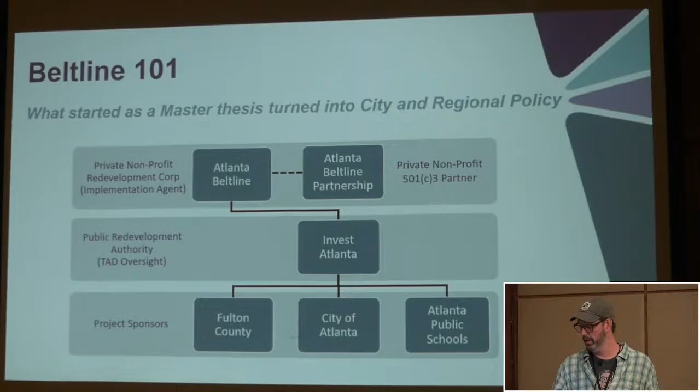The mayor and his team are actually working right now on trying to extend all of the tax allocation districts in the city. We'll see how that goes, but it's not a vote of the populace and the citizenry. It's a vote of City Council, Atlanta Public Schools Board, and the Fulton County Board of Commissioners. So we'll see how that goes. It's not a 600,000 vote, it's about 27 people, I think.

Our purpose, ultimately, is an economic development program of programs. We've got housing, affordable housing. We've got commercial development, affordable commercial development. We've got public art, the trail, park space, brownfield cleanup, transit's in there. It's basically a city building program of programs, and we seem to be doing a pretty good job of it.

We're extremely intentional about how we integrate, and we'll talk more about this, not just our corridor, but all the development along it. So you guys can read this and see where we stand.

One of the things we've done with our typologies, our design standards—who are my friends from Atlanta here, from the city? Caven? There we go, okay. So when I say this with all love and respect...

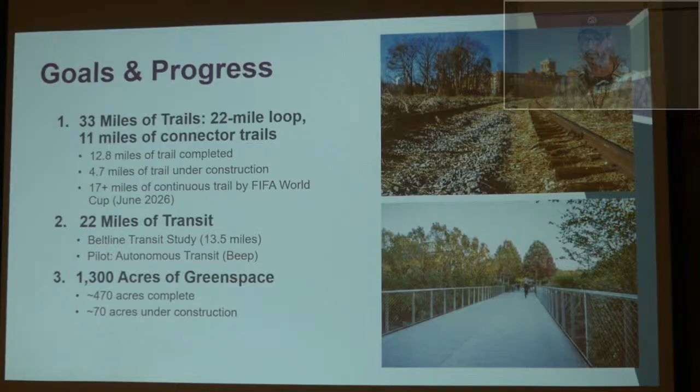The city does not have a great track record with maintenance, right? So we have picked generational materials. We've picked concrete, we've picked stainless steel, we've picked granite facing. These are all things that will last generationally, as opposed to galvanized pipe for handrails, for example, that lasts 7 years. We're doing stuff so that it's very high on the capital side of things, but from a maintenance and longevity perspective, we'll amortize it over 50 years.

As we keep doing this, the big takeaway is probably our 9, almost 10 to 1 return on investment. For the $900 million we've put into the ground, not just infrastructure but social programs for affordable housing and legacy resident retention, we're seeing about $10 billion in economic development from adjacent development and whatnot. It's been amazingly successful.

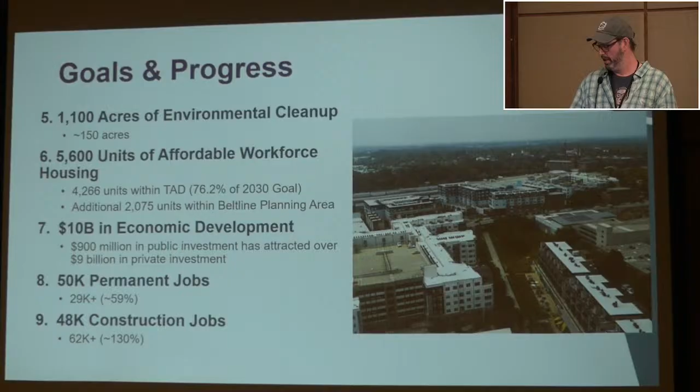I like to refer to it as a street without cars, because it does all of this stuff. With a standard development along a street in Atlanta, the zoning code tells you to do X, Y, and Z with respect to integrating that development into the street. Well, we do the same thing, just our street doesn't have any cars on it.

So I talked a little bit about this, but our typical section for the corridor, on average we have about 100, 120 feet of right-of-way width. In some places we only have 30, other places we have 300. So it varies, but for a typical section with about 100 feet of right-of-way width, we're trying to cram a lot of stuff in there, especially the stormwater.

Which is a huge thing because you think about the history of the Beltline being a former railroad corridor. If it's at the low point, people have been draining to the railroad for the last 100 years, and there's no way we can undo that. So we have to not only deal with our own stormwater to meet the city's stormwater ordinance, we also have to deal with the bypass coming from all the other properties that are draining to us. So we have some amazing amounts of underground detention, retention. It's not sexy, nobody sees it, but it's a big damn deal.

And I think with that, I'm going to turn it over to Michelle. So thank you guys.

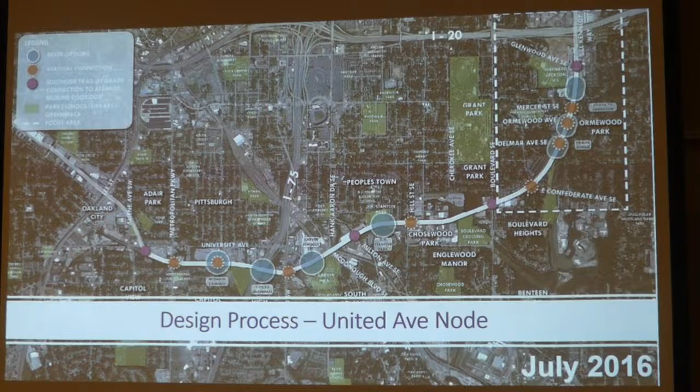Hi everyone, so thank you, Sean, for the overview. I'm going to dive a little bit deeper into one of our design processes, focused on one of the connections to the Southside Trail. What you're looking at here is one of our very first planning session boards, back in July of 2016.

We really started in on the Southside Trail a decade ago, basically. The survey was 2014, 2015. And so we started with just visioning, right? We threw every idea out there. We did a sidewalk analysis, bike lane analysis, transit analysis, property development, all of the above, all the data overlaid on each other to figure out where public access points need to be along the Southside Trail.

And so those are sometimes at-grade crossings, sometimes 20-foot elevation differences and massive ramps. I'm going to take you through one of the cool ones, which is United Ave Node, and it is one of the massive ramps. In the dashed white box kind of towards the right, that's where United Ave is.

Some of the exhibits will say Confederate Ave. Atlanta had a reckoning at some point in this design process, and we renamed Confederate to United. Big moves, so just bear with me on that one. I wasn't going to update all the exhibits.

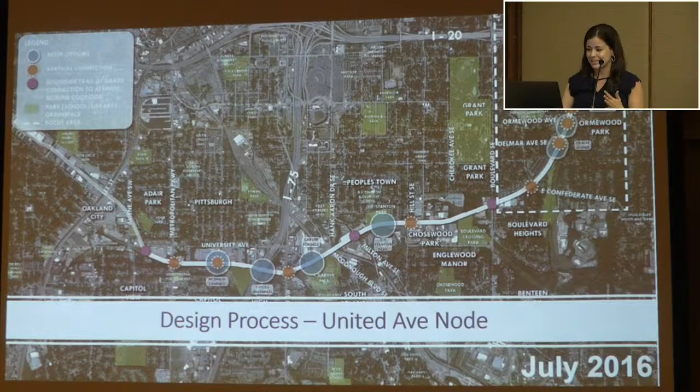So in 2016, when we took this out to the public, we just had some ideas, right? Point-to-point drawings of, hey, the street's at 920 elevation, and the bridge needs to be at 940. United Ave, and you'll see in the next slide, had substandard vertical clearance, so we knew we were going to be rebuilding this bridge no matter what, and that we were going to rebuild it to accommodate future transit.

So we know you need a 17-foot vertical clearance, structure depth, so we're looking at 20 feet of elevation gain, and how much ramp do you need to do that, maxing out ADA and landings and everything like that. We drew some squiggly lines, we drew some right angles. What ultimately stuck was this swooping arc over into the Beltline.

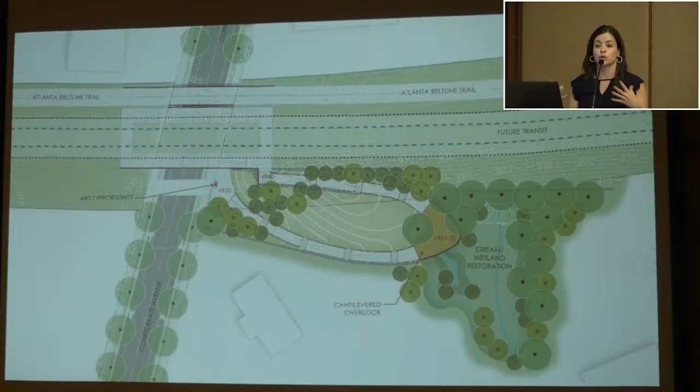By April of 2017, a full year after we had first taken those visioning boards to the public, we have this very beautiful artistic rendering of what ultimately was designed. We did not change too much from this. It starts out as a ramp that's on structure, on fill with 2 walls, eventually transitions to columns, and then swoops over into the Beltline Trail, all with stainless steel handrails and safety fence. And then that was April of 2017.

Then we really dove into years of engineering and design. I'm not going to bore you with that. Engineering documents — just know our structural engineers worked very, very, very hard.

In 2019, Atlanta Beltline opened the Interim Trail. And for anyone who didn't get to experience the Interim Trail, I am so sorry, because it was one of the coolest experiences, having a gravel trail like that in the city of Atlanta, covered in nature. It was beautiful.

And then, like I mentioned, United Ave had substandard vertical clearance. So in about July of 2020, one too many box trucks got stuck underneath, and we had to do emergency demolition. It was deemed unsafe, so the bridge had to come down.

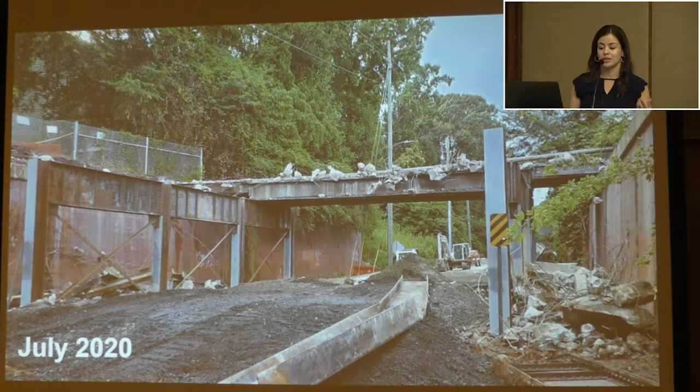Along with the emergency demolition, they also installed staircases and an RRFB that we permitted through the city of Atlanta. So quite unfortunate for some cyclists, some strollers, things like that. But we were able to get people off the trail, cross safely across United, and then back onto the trail — just a slight detour.

And so it maintained being open all throughout 2021, 2022. And then construction started in spring of 2023. So we just hit our 2-year construction timeline. It is about to be done in December.

But in January 2024 is really when they were able to start demoing the rest of that concrete bridge. You can still kind of see the steel portion on the left there. You can imagine they had to move all of that earthwork and place it elsewhere on the site. So it does take a good amount of time just moving dirt around before we can take that concrete structure down. But once that concrete structure came down, that bridge went up pretty fast.

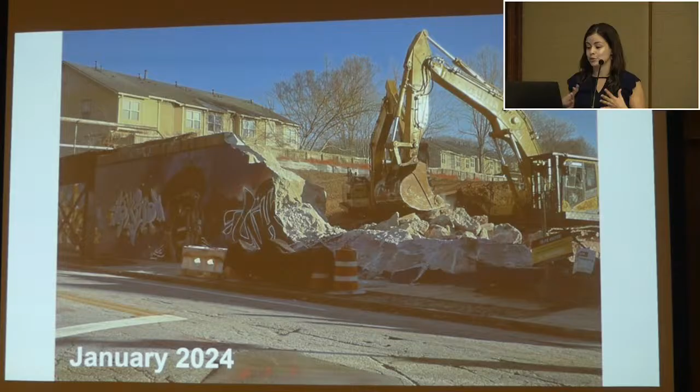So this was January of 2024. By February of 2024, we had the battered piles going in.

Funny story about this — I took one of our young analysts out who didn't know the project super well, just wanted to get them out on site. They asked all the right questions, they were doing great. We get back in the car and they were like, 'Michelle, I don't know how to tell you this, but those piles are crooked.' And I was like, no, but they're supposed to be like that. I had to explain battered piles to them — he thought he had just discovered a massive fault in construction.

So that was February. By March 2024, the rebar cage went up for the bridge that was necessary. The person in the photo is who's been working on this bridge ever since he was an intern at Kimley Horn, so he was pretty happy to see this rebar cage go up. Again, a lot that you don't see, but is really exciting to us.

By August 2024, we were installing footings for all of those columns. And I like to show the photo on the left because you can actually see a person in there. These footings are massive, and it was confusing to me at first because I was like, it's a pedestrian bridge — why are these footings massive? It's just that there's no live load on it, you know? It's different when there's a tractor trailer on I-75 versus me and my bike on this ped bridge. So these were massive, massive footings that we had to excavate all out to get them in.

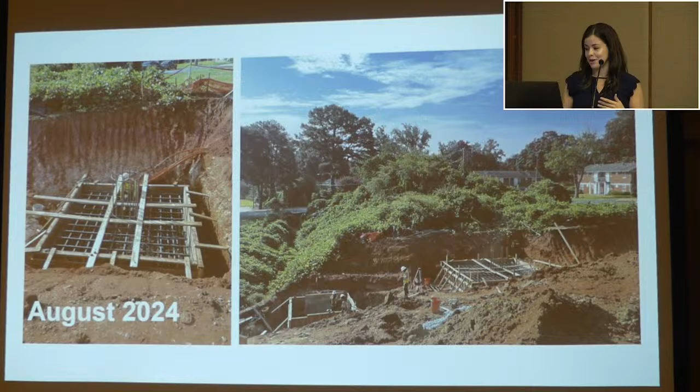By January of 2025, that was all covered, and we were starting to fill things back in. Columns went up, and we have about a third of the wall there on the left. What's going to go in this area between all the columns is actually a green infrastructure pond, a really nice landscaped above ground pond.

Then about April of 2025, the wall on the left is now complete, and we're starting to build up that next wall that comes from the sidewalk. This is about where it is right now, and not much progress has happened since April, but this connection point will be complete by the end of this year, so we're really excited about that one. I'll be taking a before and after shot with the rendering.

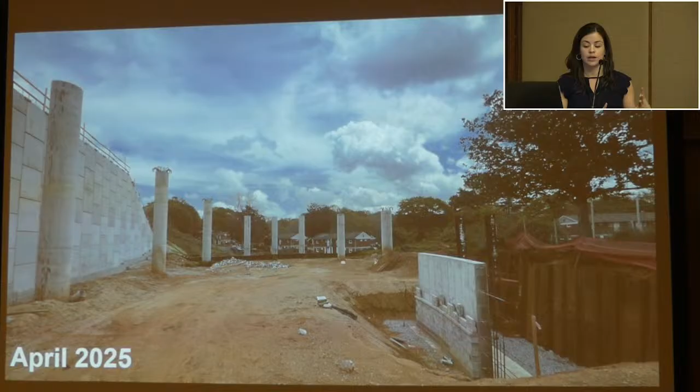I don't know if you want to also talk about lessons learned. We've all learned along this process. Like Sean said, the Beltline has 20 years of experience building trails, and that's super crucial. We're still implementing new trails - Southside Trail is under construction right now, and there are future segments to be constructed. It's important that we learn from implementation and from the maintenance concerns that Beltline is seeing.

We can design a 3 to 5 foot shoulder and a 3 to 1 slope, and think it's stable, it's going to be landscaped, it's going to be great. But if Beltline's having their crews go out there after every major storm to clean up dirt off the trail, that's not sustainable. So we do have to pivot, and having certain segments in design and being able to do that is amazing. Having people who truly care about making this a low maintenance facility and learning constantly, making it better throughout the years.

Pretty rudimentary, but I'll tell everyone this: visit the site while it's raining. Like Sean said, everything dumps onto the Beltline. So understanding where water is flowing, where water is pooling, is super important. We have massive underground detention systems, as well as above ground swales and ponds that all help resolve some of these issues we were seeing years ago.

Most of y'all have probably been on the East Side Trail. This is one of those things we're learning from implementation and maintenance. Runners had started to develop their own shoulder for running, and you can see it was tearing away, becoming a dirt ditch. So what Beltline did was install a soft shoulder for those runners, which helped limit the dirt shoulder that was happening there.

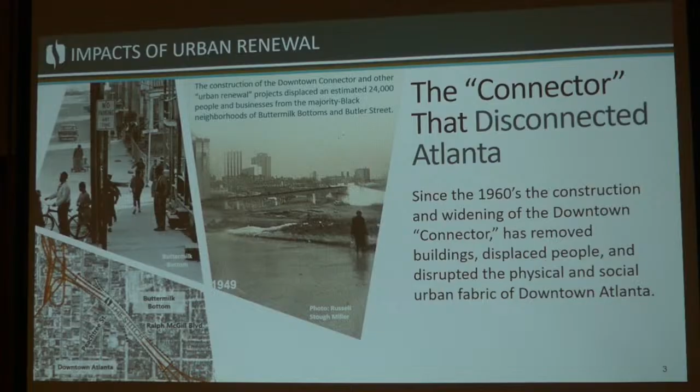This is about connecting communities, reconnecting communities, and as many of you know, when the downtown connector was constructed back in the 60s and widened, it had an impact. It divided what used to be a connected community that did cause displacements. And so, the original spirit and idea of the Stitch to place a lid over the connector to reconnect the community is the heart of this story. And it also provides an opportunity to catalyze developments and to just improve the city overall.

So when we got started on this project a couple of years ago, the first thing that we did was a Stitch master plan. Now the Stitch in concept has been around for a very long time, more than 20 years. And the original idea for the Stitch came from civic leaders who worked in what's now the Truist building, looking out of their window and thinking, what could we do here? Could we do something to transform downtown? And over the years since then, ADID had different points where they looked at different opportunities, but when the Stitch master plan funding came through and a RAISE grant, that was when everything really got rolling. And so that's when our work began, and it has continued since.

The master plan process went on for about a year and a half, and it was a soup to nuts effort that involved a lot of community engagement. We started with a baseline analysis of what conditions were. We worked with the community to get a vision and goals that everyone could buy into, and then worked through recommendations. Now we're at a point where we're working on those next steps.

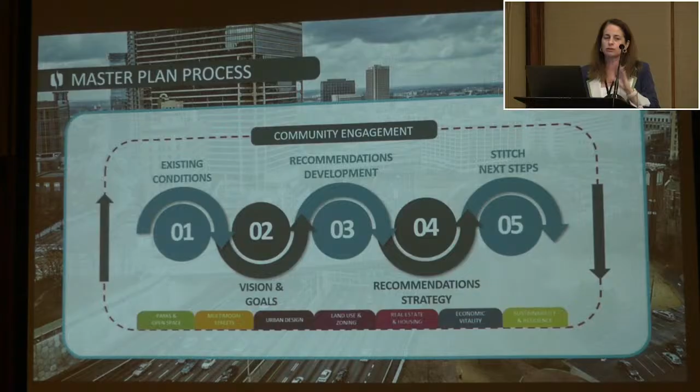So I'm going to show you a little bit of the high-level illustrations, and then Tori and Andrew are going to talk about some of the design challenges we're working through today, because if this project is anything, it's complex. While there is the vision for reconnecting the community, the park, the City of Atlanta street network, we also have to do that without interrupting operations on the downtown connector. So all of that comes into play with everything that we do.

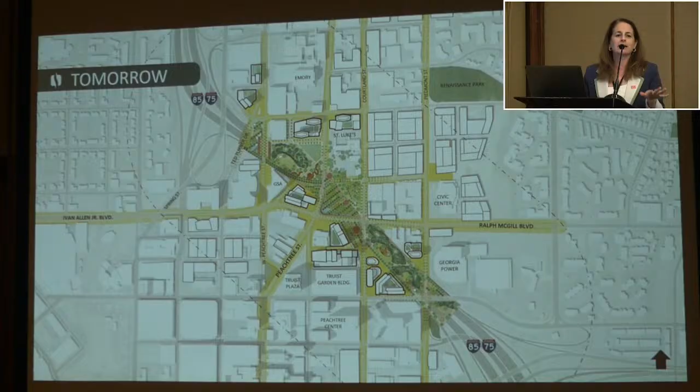So here is another view that shows where the phases of the Stitch Park will go, how that interacts with some of the existing development in the area and other development areas that the city will plan to redevelop.

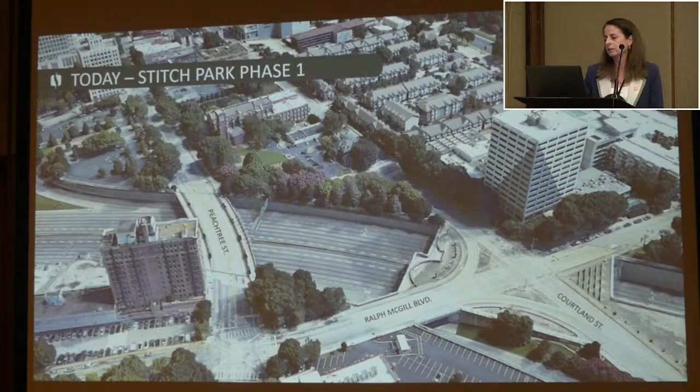So today, this is a photograph of the Stitch Park Phase 1. Phase 1 is where we are currently focused on our design activities. The project received a Reconnecting Communities Neighborhood Partnership grant a couple of years ago to construct the first phase. I'll talk more about funding in a few minutes, but this gives you a sense of that boundary - Peachtree, Ralph McGill, and Courtland Street - and the planning work that will become the Phase 1 park.

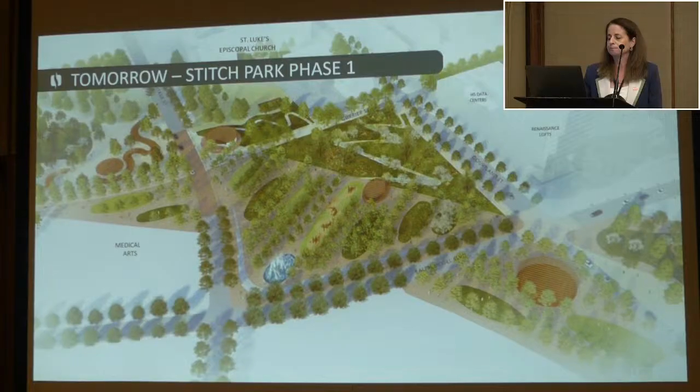That's the rendering before you now. When we extend beyond Phase 1, there will be 2 additional phases, a total of 14 acres for the park with many different features - amphitheater, event pavilions, all types of things that have been envisioned with help from the community during community charrettes. So a place that everybody can see as a destination, and people who live in the area can walk through and enjoy every day.

So a phased delivery strategy is, of course, really a requirement when we're talking about something of this magnitude. So I talked a lot about partnership. For long-term maintenance and to help ensure a sustainable funding source, a special services district has been approved by the Atlanta City Council.

What that means is that the Stitch will become something similar to the Beltline, right? Beltline Inc. operates as its own arm focused on implementation, operations, and maintenance. That is the vision for the Stitch as well - Stitch Inc. So we're on the road to establishing Stitch Inc. and the administration of the project.

The Beltline talked about a lot of the operations and maintenance decisions you have to make. That's true of the Stitch as well, a lot of lessons learned there. And then, of course, park programming - there's a lot of thought and organization that has to go beyond that. Right now, the timeline we're looking at is all 3 of these phases delivered by 2036.

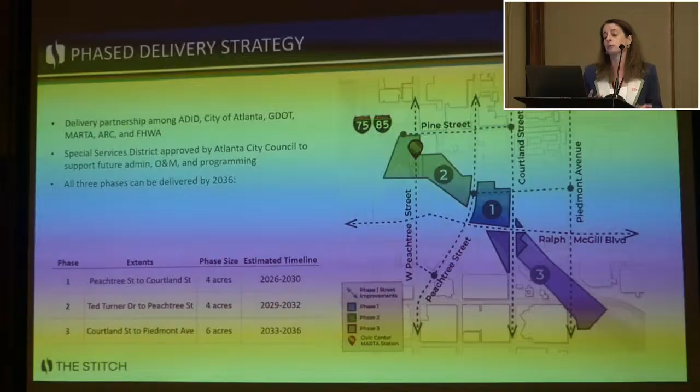But right now, we're still working with our partners. We're still moving forward. If it comes to pass that construction funding is no longer available for the Stitch, there are other sources and other ways to do that. So we have not lost any momentum.

And I'm going to turn it over to Tori to talk about what we have going on to get to the finish line.

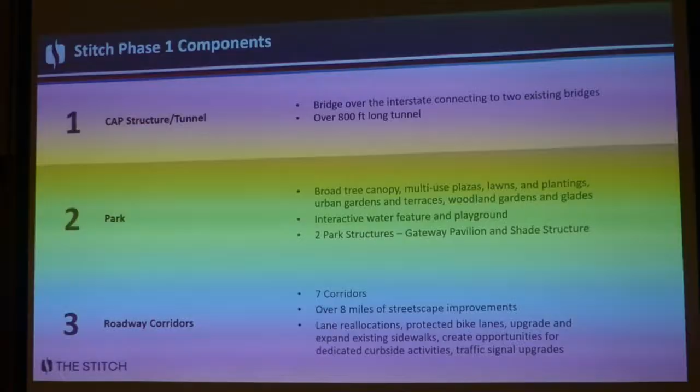Claudia gave an overall description of the Stitch project and all 3 phases, so I'm going to dig deeper into the Stitch Phase 1 components, which we're currently designing.

The first component is the cap structure and tunnel itself. This will be a bridge over the interstate connecting to 2 existing bridges, the Peachtree Street Bridge and the Courtland Ralph McGill Bridge. Once constructed, it will create an overall 800-foot long tunnel, which will need all the tunnel systems, including fire protection, lighting, ventilation, signage, and communications.

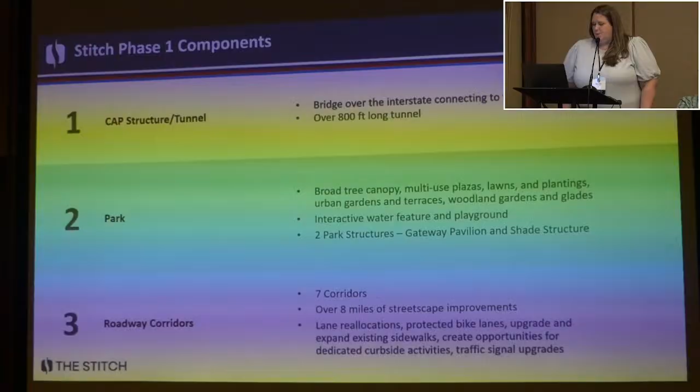The second component is the park, which will go on top of the Stitch cap. It'll also expand onto the existing structures, and encroach on the areas on either side of the interstate, which are now the City of Atlanta's Mayor's Park as well as the St. Luke's Garden. That'll create a new 4+ acre park for Stitch Phase 1.

In that park, as Claudia described, there'll be plazas, gardens, an interactive water feature where children can play, a playground, and a big fountain that'll be a beacon to the park. Items like that are included in the design.

One thing some people may not know is that also included in the design of the park are 2 structures, basically buildings on top of the cap, which is on top of the interstate. Proposed is a gateway pavilion and a shade structure in Phase 1, and those will have facilities such as restrooms, maintenance activities, as well as a space for a cafe or food vendor.

The third component I want to talk about are the roadway corridors, and this is one that some people don't know about. Included in the Stitch Phase 1 project are 7 corridors in downtown Atlanta and over 8 miles of multimodal and streetscape improvements. We'll be looking into lane reallocations, protected bike lanes, upgrades, and expansions to existing sidewalks.

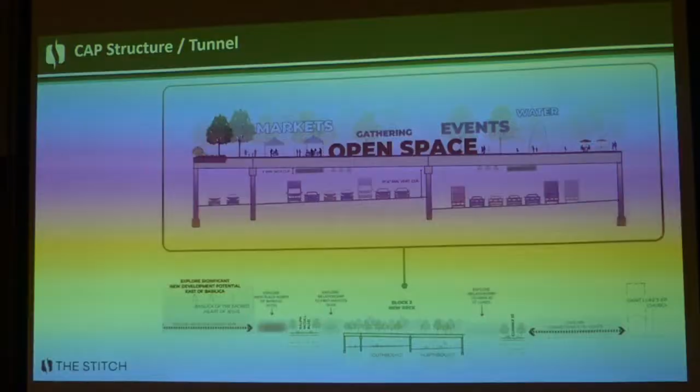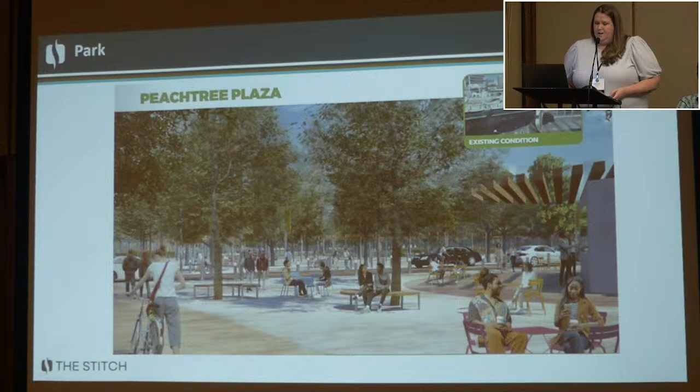This view is of Peachtree Plaza, in the center of the park, looking towards the existing Peachtree Street Bridge. This will be a place of gathering where one of the structures will be located as well.

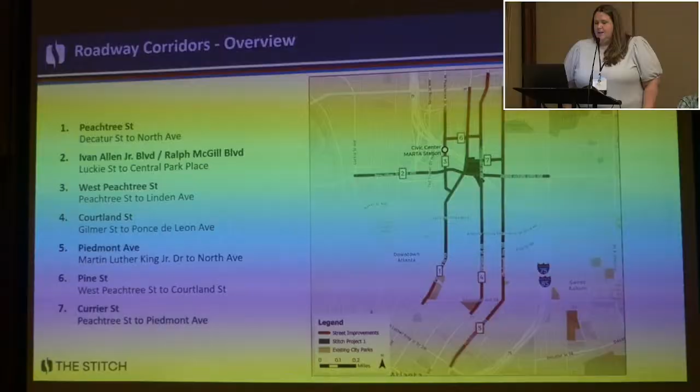With any project of this size and complexity, there come design challenges and opportunities. I want to talk through a few of those we're fleshing out right now. One major design challenge is determining the spans and bents for the structure itself. This bridge has to support a heavy load, including the structures on top of the park, as well as 30-foot trees that are planned.

One of the biggest outcries from our public engagement was the need for shade and a big tree canopy. To accomplish this, we're proposing large trees, which of course are heavy, and the soil needed for those large trees is also heavy.

So we've looked at a multitude of alternatives for the span and bent alignment. Right now we're looking at a 3-span bridge with steel girders. We've also looked at a single span with steel girders, as well as a 2-span alternative that has concrete pre-stressed girders.

The cap structure will also need to analyze a live load, because there'll need to be an emergency path for emergency vehicles, as well as for deliveries and maintenance activities.

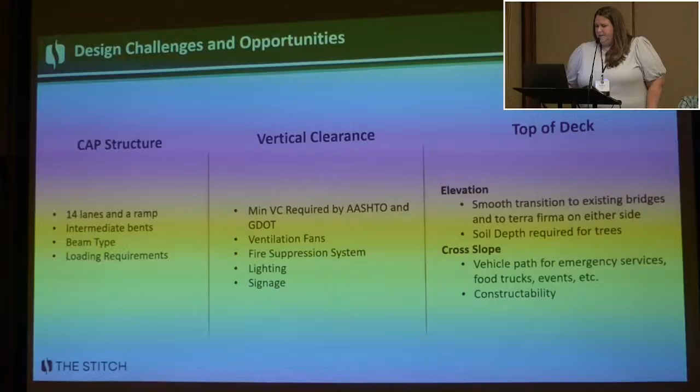Another challenge with the cap structure itself is the vertical clearance. With the systems required for the tunnel and meeting the minimum vertical clearance, and also trying to tie into the existing bridges with a smooth transition, it's all kind of a balancing act.

For the large trees, we need 5 feet of soil.

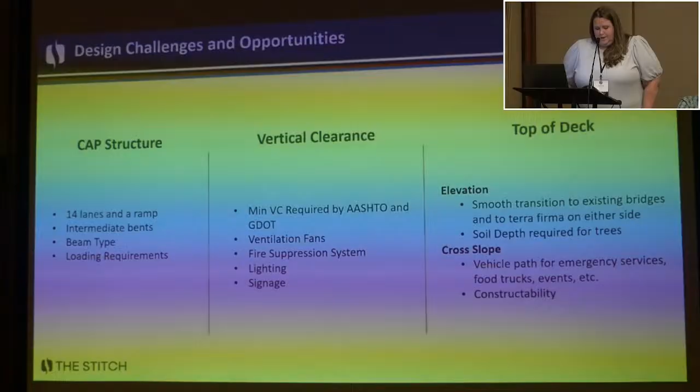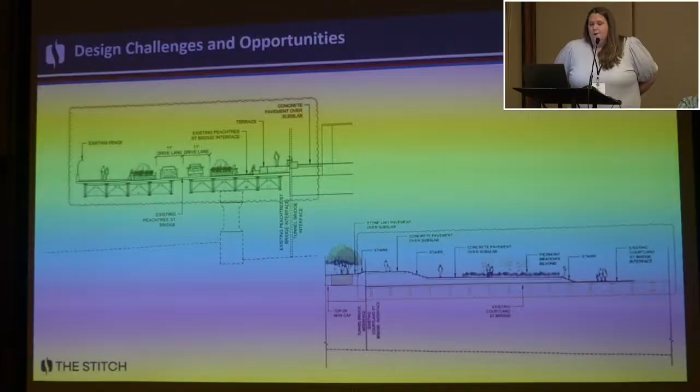Here you can see some draft typical sections of how we're mitigating some challenges with the grade difference between the existing structures and the proposed new top of ground line. We're looking at terraces and planters, as well as some other solutions.

So I'm going to turn it over now to Andrew to talk about ITS and signage.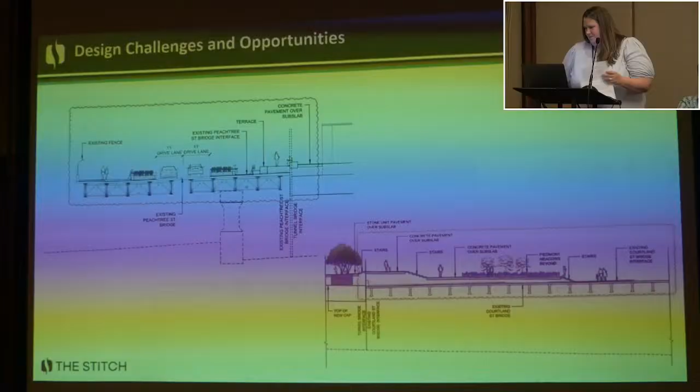Thank you, Tori. So I'm going to talk a little bit about the ITS, the signage, and even some pavement markings that we're going to propose that are innovative and kind of unconventional applications for the project. As Tori mentioned, this is an 800-foot long tunnel, which the National Fire Protection Association classifies as a Class A tunnel, which is kind of an intermediate tunnel.

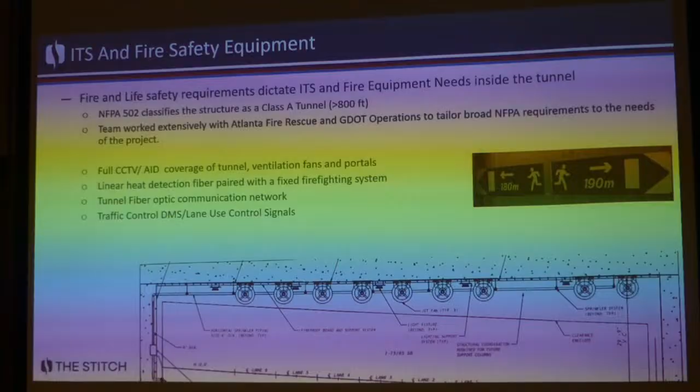So we worked extensively with Atlanta Fire Rescue and GDOT operations in order to kind of tailor those vague and broad requirements to really apply them to the project.

So some of the things that we're doing is there's going to be full CCTV and automated incident detection coverage of the tunnel, so every single lane. We're going to look at the ventilation fans and the portals to make sure everything is up and running in the case of a fire emergency.

There's also going to be a linear heat detection fiber optic cable that's tied to a fixed firefighting system, and then a separate tunnel fiber optics communication network that'll tie into some traffic controls, DMS and lane use control signals.

As Tori mentioned, we have a very constrained vertical clearance. That has been a huge challenge when it comes to signing, especially overhead signing. So the signs are going to be 30 inches tall, 2.5 feet. You're usually getting about 20 feet. So very different than what you're used to.

And we have exits in the immediate vicinity of the tunnel that we have to sign for. So we also wanted to think about the future build out of the second and third phases of the cap and avoid any rework when it comes out to that.

So we looked at the MUTCD. There is very minimal and vague guidance. It's just kind of do what you need to do. So we looked at national and global examples of signs in constrained spaces.

The first place we looked was the Big Dig in Boston. Another great example was the Fort Pitt Bridge in Pittsburgh, and then the Alaskan Way Tunnel in Seattle. And they didn't really have everything that we needed, so we decided to broaden our reach and look internationally. So we looked at the A86 in Paris and the A7 in Linz.

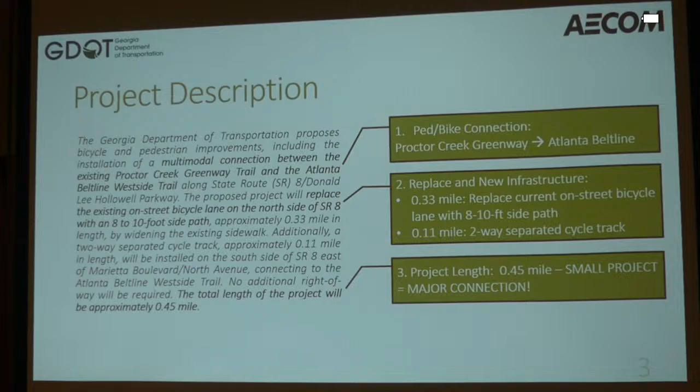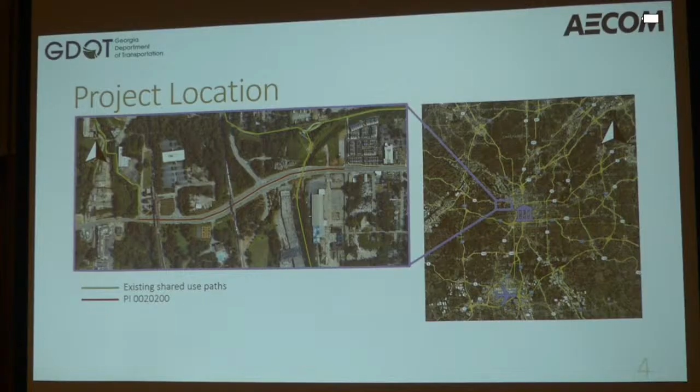So again, this small project, major connection. It's only less than half a mile, and we're hoping to make this major connection. So we have the Capitol, we have the airport - you can see it's just on the west side of Atlanta here. We do have the Atlanta Beltline connection over here, and then we have the Proctor Greenway.

All right, I'm going to hand it over to Sarah to get into the details.

Good morning, everyone. I'm really excited to talk to you more about this project. Jonathan, thank you for giving us a little bit of background on the project location. One other thing I'll highlight right now, above that red line for our PI, is we have our Bankhead MARTA station, and we also have Maddox Park. So we have a lot of generators in this area that we're looking to connect, and we have some existing and some newly completed trails in the area.

So I'm going to dive in a little bit more to the project justification, and then after this, show you some fun visuals and numbers that I think get me really excited about the impact beyond this half-mile segment.

For this project, when we looked at justifying it, we were looking at doing a predictive BC. We do have historical crashes along the corridor. If you're familiar with Donald Lee Hollowell, it's a pretty busy road, about 20,000 ADT, principal arterial. You already have those existing PED generators - you have MARTA, you have Bankhead, you have Proctor Creek.

So there is activity and there were historical crashes. But when we looked at this project, we wanted to justify it and give it credit where credit's due. We know with trails like the Beltline, you're going to experience additional demand. People are going to have a new facility, new connections - whether they use it for work, leisure, or play, you're going to see more people in the area. We wanted to account for that with our justification for the project.

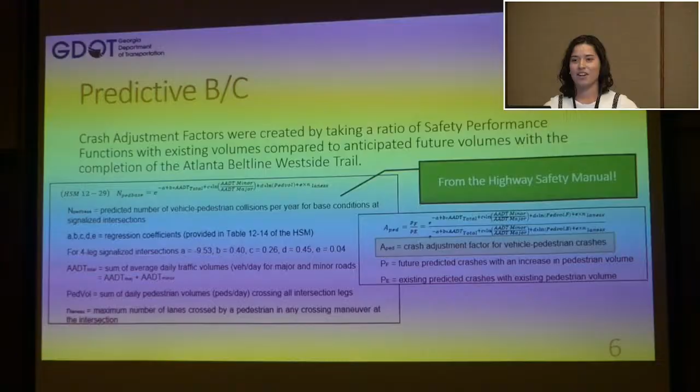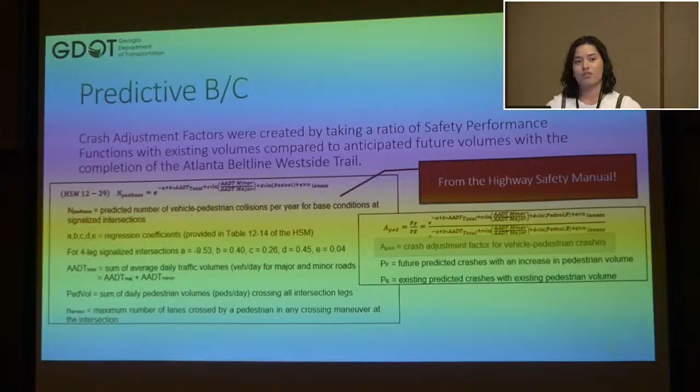Our friends at the Beltline actually were really awesome - we had existing counts, that data, the TMCs, the PED volumes, but how do we try to put a number to what we're expecting to come to this corridor? Thankfully, there were similar sections of the West Side Trail already constructed, and they do a great job collecting data, so we were able to partner with them. They shared their count data, and we were able to use that as our predicted future volume. We plugged it into the BC and were able to see what our facility, our new side path, would be able to bring to the corridor.

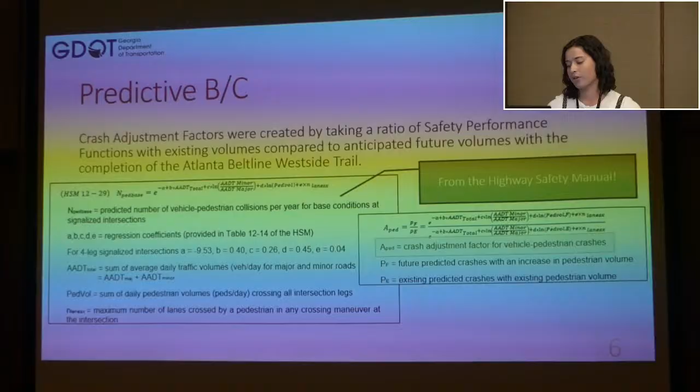All right, potential for impact. I think you'll see how this builds into our expectation to see more people out here on the corridor. As Jonathan mentioned, we have 2 trails: the Proctor Creek and the Atlanta West Side Beltline. Those are really catering to your interested but concerned cyclists, all ages, all abilities, a lot of different people using them.

But if you want to connect between the 2, you have about a half mile where if you're new to cycling, you're younger, you might not be comfortable. So right now you might have people who aren't making those trips, or choosing a different mode because they're not comfortable walking, rolling, or biking through that half mile. So we're coming in to provide a facility that moves you from the somewhat confident range over to the interested but concerned cyclists. We should be catering to both user groups on either side of our corridor.

If you're familiar with Donald Lee Hollowell, there's a lot of uses and demand on it. I myself fall in between interested but concerned and somewhat confident, but there's something to be said about cycling alongside 20,000 cars and heavy vehicles - it's not very comfortable. If you go into Google Street View, and we saw it in the field too, you see people using the sidewalk, much where our side path will be in the future.

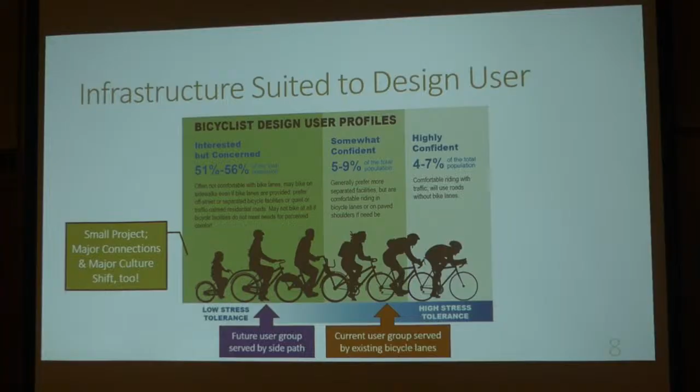Let me illustrate a bit more about the potential of this trail to increase walking and biking in the area. Take a look at these numbers and remember them for the next slide. A walking trip might take you 20 to 25 minutes for 1 mile. A cycling trip for the same distance might take 5 to 7 minutes, or even 2 miles you can get there in 10 to 15 minutes.

Now, I do think we have a choice in our modes, but it's also our job as stewards of our transportation system to make that choice a comfortable one. I just don't think you can expect someone to choose to walk or bike if it's not a comfortable facility. So this project is trying to make that choice a little bit easier for people in the area.

So y'all can break my heart here, but I hope you don't. I want you to raise your hand if you live within a mile of a grocery store, a gym, or a park. Cool, now keep it up. Now you can drop it, and you can break my heart if you want to - and some of you will, and that's okay, right?

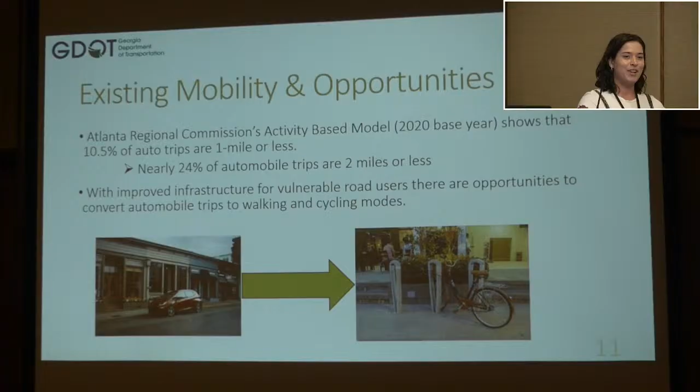So these last few images I just want to illustrate how we might have impact beyond just our half-mile corridor. Now these are as-the-crow-flies distances, like a mile radius. Obviously we need more projects like ours that provide that backbone infrastructure to really make a complete trip feel safe, because if there's a break in a link, you might not take it, especially if you're in that interested-but-concerned group.

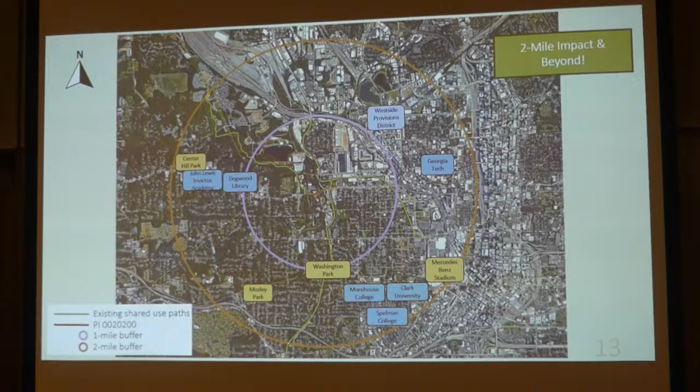I hope y'all can kind of dream big too and see the big impact that a small project may be able to have, making safer, more fun, and livable communities. So that's all we had.

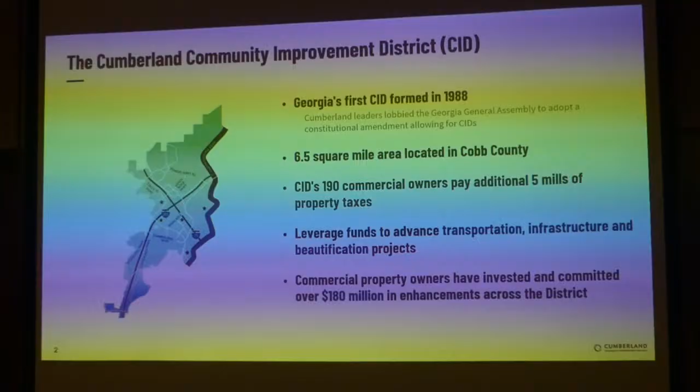Our real estate value has increased over $2.2 billion in the past decade, and we have 10 million visitors annually to our district. Now, of course, those of you who know the area know the big driver for that is we are the home of the Atlanta Braves at Truist Park. So that's also a unique factor for us.

So here's a little bit of our history. Again, Cumberland, for those of you who know the Atlanta area, really started to become a place in the 70s. We had our first high-rise come out of the ground there at the intersection of 75 and 285 in the early 70s. The Cumberland Mall opened in 73. I-75 was completed, making that link in 77.

In the 80s, all that growth began to create some concern about transportation, was traffic going to hamper the continued vibrancy of the area. So local developers, led by John Williams, came together and talked with the Georgia legislature, which led to the formation of CIDs and Cumberland in particular. In the 1990s, the CID fostered a lot of transportation projects to better connect our district. We had the Cumberland Loop Road, which came about, the Kennedy Interchange, the Windy Ridge Reliever.

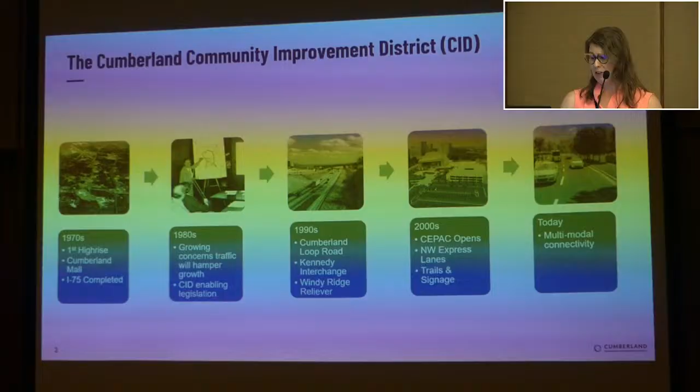And then in the 2000s, we saw the opening of the Cobb Energy Performing Arts Center, and we began to look at additional modes of transportation in the district. One really important thing is that in 1992, the CID actually expanded their mission to include looking at transit, and we'll talk a little bit more about how that figures in later.

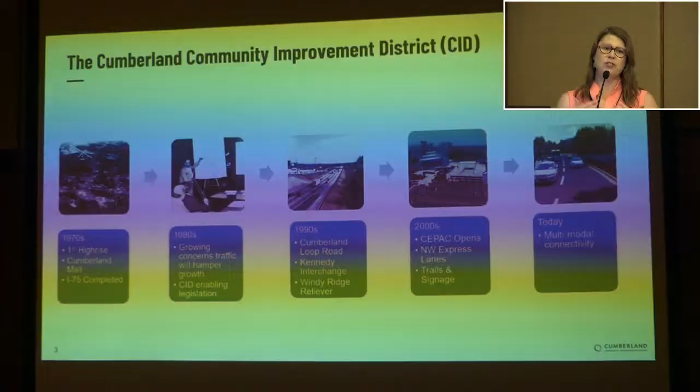So today, our focus is really on the multimodal connectivity. We've got great transportation infrastructure in the district, but we need to serve our residents and our visitors with the bike and ped connections and also the first and last mile transit connectivity.

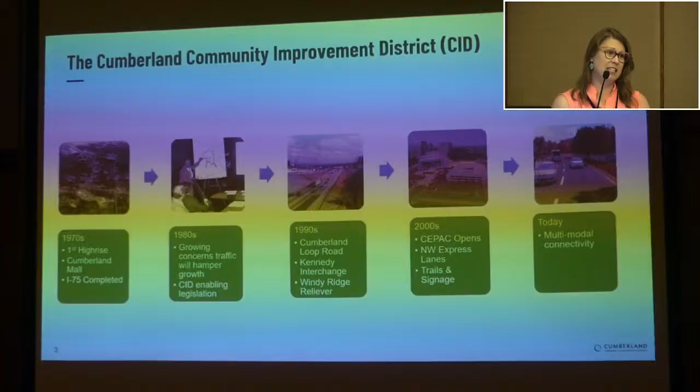And this is what brings us to the Cumberland Sweep. It's a 3-mile multimodal path connecting our major employment, cultural, and entertainment destinations. These include the Battery and Truist Park, Cumberland Mall, Cobb Galleria Center, which is Cobb's Convention Center, and also the National Park Service. We have 2 units of the Chattahoochee River National Recreation Area within our district. One, Paces Mill Palisades, is the highest visited of those units and gets about 300,000 visitors annually.

The sweep will have dedicated lanes for walking and biking and also an innovative autonomous shuttle system with the goal of providing safe multimodal transportation to our growing district and to provide that first and last mile connectivity linking all of our regionally significant trails and transit.

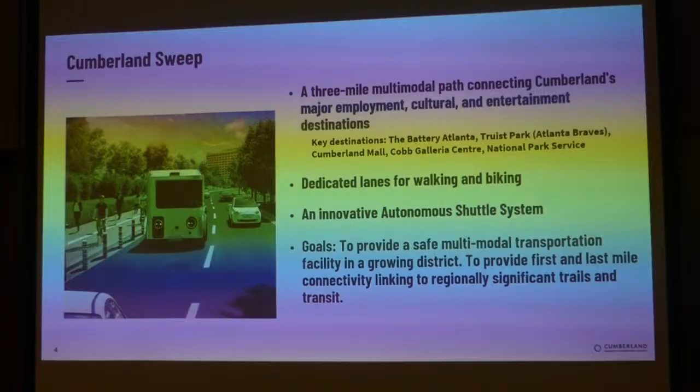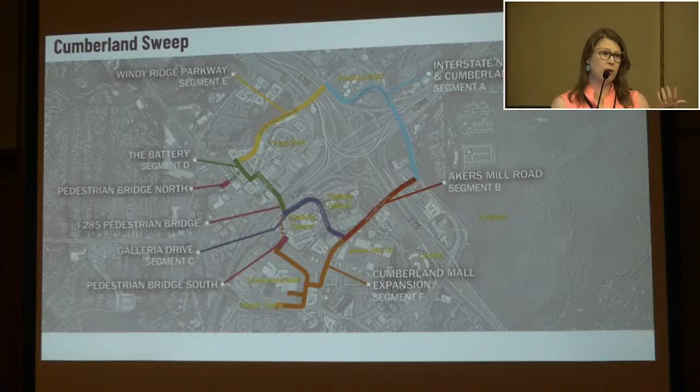And here you can see the sweep in its entirety. We have 6 segments of bike and ped and AV, and then also our 2, they're in pink, pedestrian bridge connections. One is an existing pedestrian bridge that connects from Cumberland Mall over to Cobb Galleria Center. And then there's a new bridge that we are currently in design for, which will connect from the city of Smyrna directly into the Battery, into Truist Park.

So I'm going to focus now really on the AV segment of the sweep, or that component of it. And the idea for the sweep came about in 2017. I think the CID sort of looked at what Atlanta was doing, saw the Beltline, and said, hey, we kind of want that sort of connectivity for our district too. Fast forward to 2020, that's when the idea for including AV and an AV shuttle came into the conversation.

And then in 2022, we, after some research, decided, okay, if we're going to move forward with AV, we need to really dig in and do a study of what that potential is and what the viability is for AV in the sweep. So specifically, we wanted to look at sort of the operational concept, what that would look like.

Also, we needed to look at sort of the challenges and risks that we had with deploying AV in the district, establish some of the technical specifications for deployment, what sort of vehicle capacity would we need, speed, the max grades that we could achieve. Cumberland, as you may know, has a lot of hills within it, so could we actually viably use AVs in the district, and also what the range would be for electric AVs.

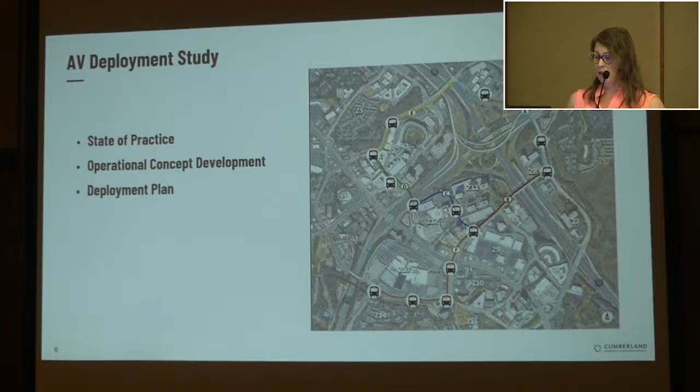So just a little bit more on the deployment study. We assessed each segment of this sweep for constructability. We looked at alternative alignments, evaluated potential stop locations, and one major component was analyzing our ridership potential.

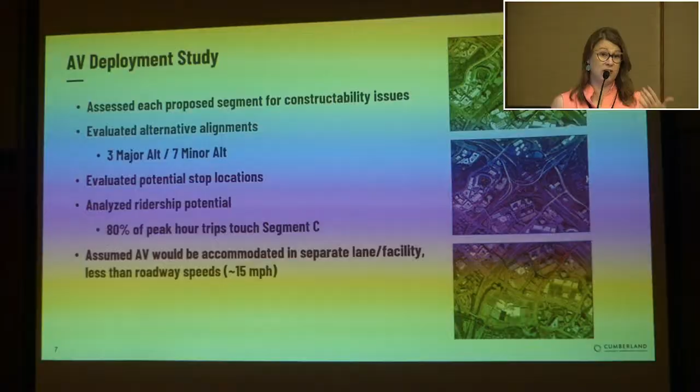Through that analysis, we saw that 80% of our peak hour trips touched segment C, the dark blue segment connecting from Cobb Galleria Center, basically from Akers Mill over to the Battery into Truist Park. That really informed that this is the first segment we went to design, and we're actually looking to go to construction on segment C in 2026. So that really gave us the idea of where we needed to start with this.

Also a key point is that in this study done in '22 and '23, we were working on the assumption that the AV would be accommodated in a separate facility, a separate lane, and that it would be at less than roadway speed, so we'd only be looking at a max speed of about 15 miles per hour.

Some of the key findings: segments C, D, and F had the highest demand. The user benefits were significantly reliant on a dependable headway of 10 to 15 minutes. That's important because we have a current circulator system in the district - Cobb Link has the blue and green circulators, which operate on about a 30-minute headway. So we really saw that reducing that headway would be of great benefit to riders.

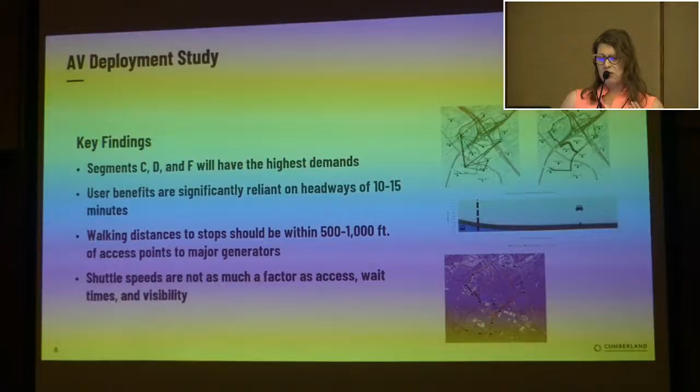Walking distances to stops needed to be about 500 to 1,000 feet with access to the major generators in the district - Truist Park, the Galleria, the mall. And shuttle speeds were not as much of a factor as access, wait times, and just the visibility of the mode within the district.

So we took all the information we gathered from our deployment study and moved into a pilot phase. In partnership with BEEP, we deployed on essentially segment C of the sweep and then also connecting over the I-285 pedestrian bridge, which connects from Cobb Galleria Center directly into Truist Park. Our goals were to learn and become a regional leader in AV technology, to raise awareness of the technology and its use in the district, and to educate the public and our key stakeholders.

We had over 11,000 riders on it, and one important thing we did was survey all of the riders. We had feedback that about 90% had a good experience, 93% felt safe, and 87% wanted to see AV and more AV throughout the Cumberland District.

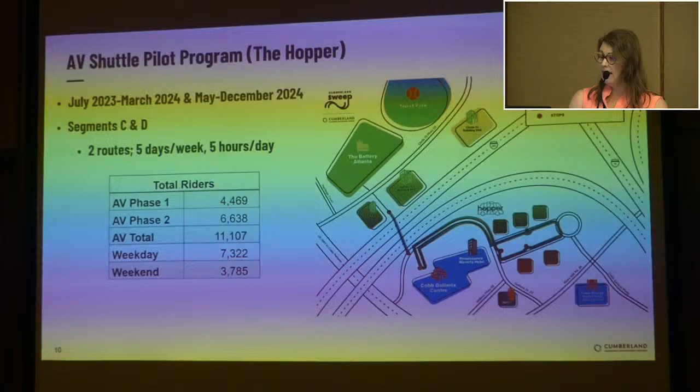Here you can see the routes we ran with our pilot. We ran 2 routes, 5 days a week, 5 hours a day. We had 2 phases, and again over 11,000 riders total, and we saw higher weekday ridership than weekend ridership through our pilot.

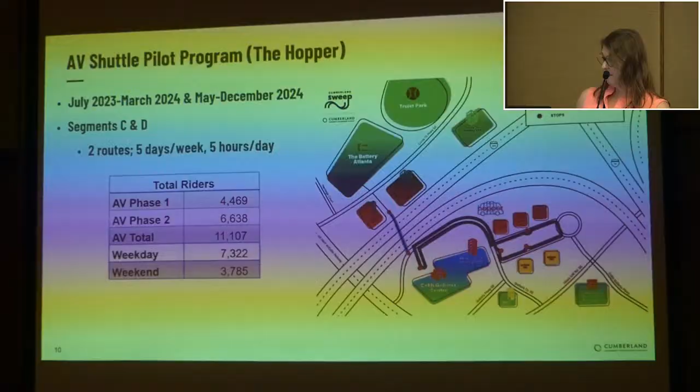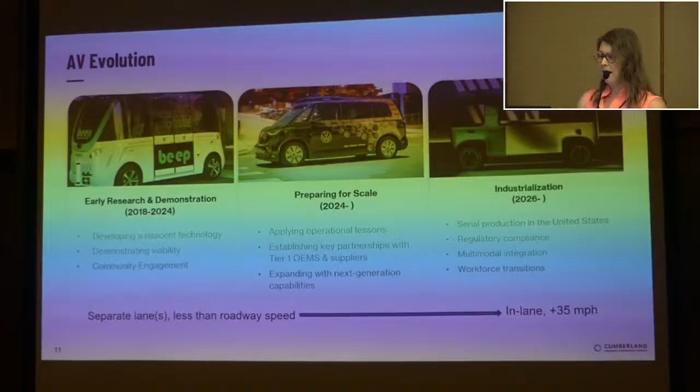Currently, AVs are preparing for scale in transit, looking at retrofitting existing vehicles to work as AV - VW is one of the retrofits being deployed. We're moving toward industrialization and actually purpose-built AV shuttles. Whereas the ones in our pilot, and the retrofits, still have a steering wheel and a driver facility within them, in the purpose-built AVs that's gone - it's just an autonomous vehicle.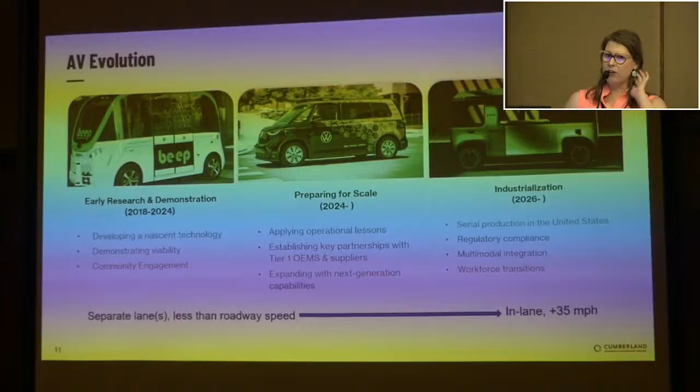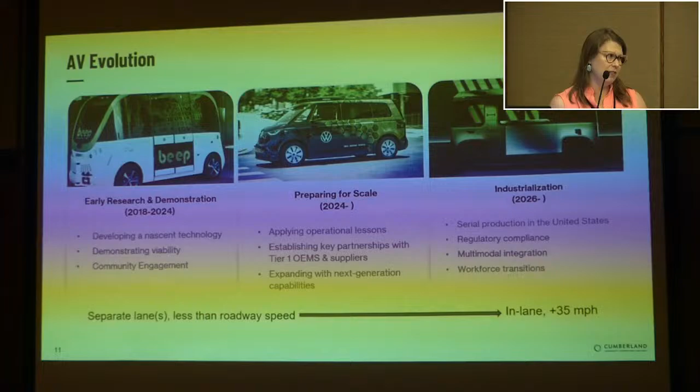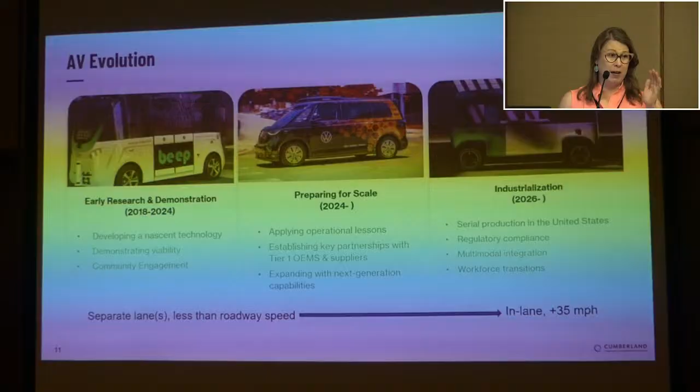Also, one really important thing we've learned is that as we move toward industrial scale AVs, the separate facility is no longer needed because we can reach roadway speeds. We're now looking at a vehicle that can reach about 37 miles per hour, and our roads within the district are posted at 35. So we've dropped the need for the separate facility, which has transformed the way we're looking at our project. Whereas before we needed right-of-way for bike, ped, and AV, now we just need bike ped right-of-way, and we can move the AVs to in-lane. It also lets us separate the two components - we can move forward on both at the same time, and bring the AV to market much quicker.

We've mentioned that we have partnered with Beep on this, primarily because of what they offer and also the depth of their experience. They've had AVs on 50 different routes in 9 to 10 different states. They've worked in a number of different capacities, deploying in cities, campuses, districts, and national parks as well. So they've got a great depth of experience to draw from.

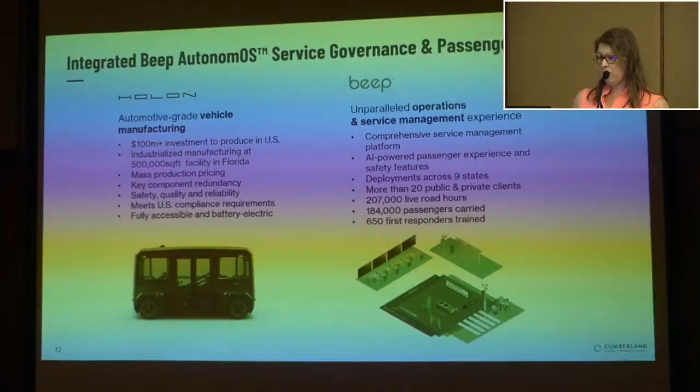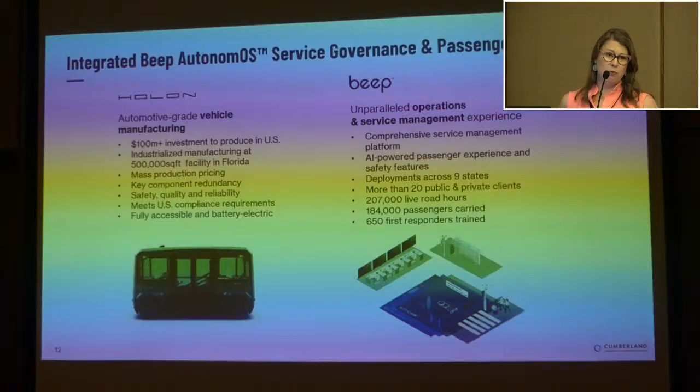They also offer turnkey mobility as a service. They can come in and actually run the program for the CID or for our partners. And they're partnered with Holon, which is actually a subsidiary of Benteler, an OEM auto manufacturer with over 100 years of history. So we have a great partnership there to depend on.

This is the vehicle that we're looking at deploying in the district, the Holon. It's sort of the next generation platform, a fully accessible vehicle. It can actually kneel to provide accessibility and has automated lock-in for wheelchairs.

It's a level 4 autonomous drive system, so fully autonomous. It uses Mobileye as the ADS, which has radar, LiDAR, and camera sensors, so you have that 360 view of things, as well as supervision provided through Beep and their AutonomOS software, which is an AI-enabled in-cabin monitoring that feeds directly into a command center.

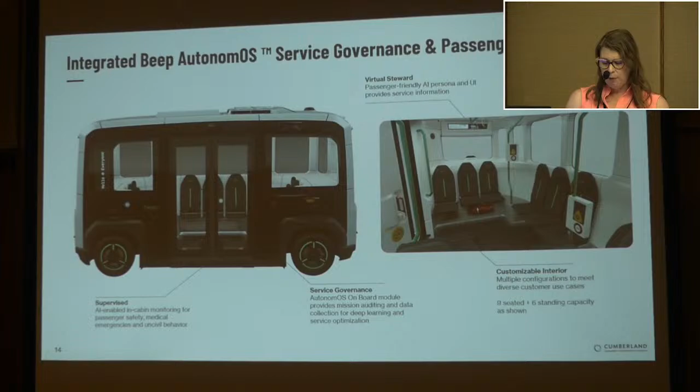A little bit more on Beep's AutonomOS system, providing service governance and passenger experience in the vehicle. It has AI enabled to really parse all the data coming in through the Mobileye technology and identify any service or safety impacting events. It kind of amplifies the human in the loop decision making, helping inform the command center very quickly of things taking place and adjust the system in real time.

Just an overview of our strategy with this, as we're moving towards deployment of the AVs in the district. We're really looking to establish Cobb and Cumberland as a center for autonomous mobility in the region. We're looking at transforming the way that people can move about our community in a car-free manner.

We have a great asset in the Cumberland Transfer Center and CobbLinc in the district, located on segment F of the sweep. So we have connectivity throughout all of Cobb County through CobbLinc, and also connectivity into the MARTA system directly from that. So employing the AVs gives us that first and last mile connectivity.

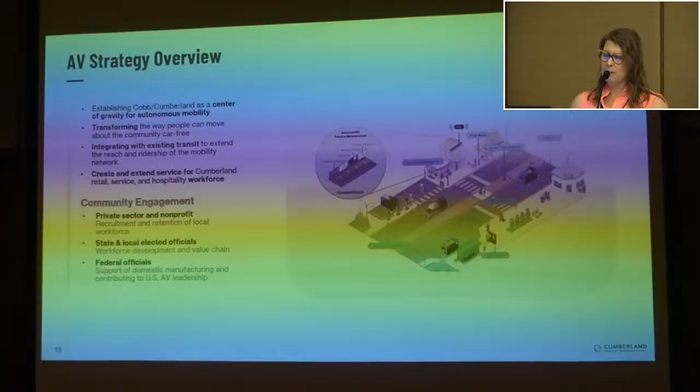That's so key, especially as we look at the 10 million visitors that come to the district annually and how we can move them about. The integration with existing transit is key for this, and then creating and extending services, especially for our workforce. We are an entertainment and hospitality district, so we know we have a lot of hourly workers and workforce that can benefit greatly from having that first and last mile connectivity.

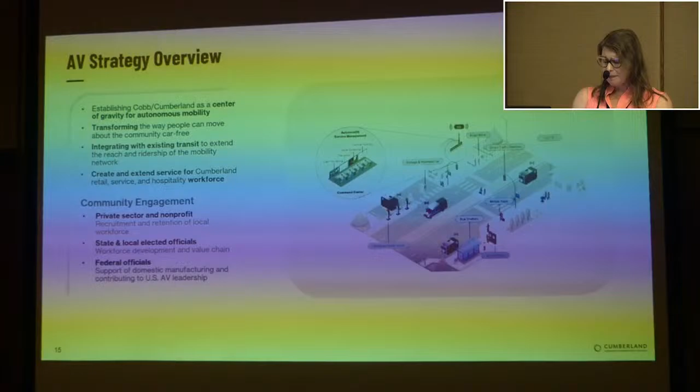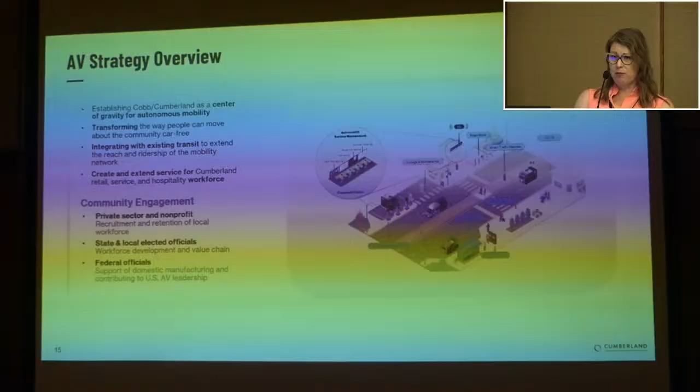As the other presenters have mentioned today, partnership is absolutely key in these transformative connecting projects. We would not be able to do this without our partnership with Cobb County. They've been great. The ARC has been very supportive, and GDOT has also been very supportive of our efforts on the sweep and with AV in particular.

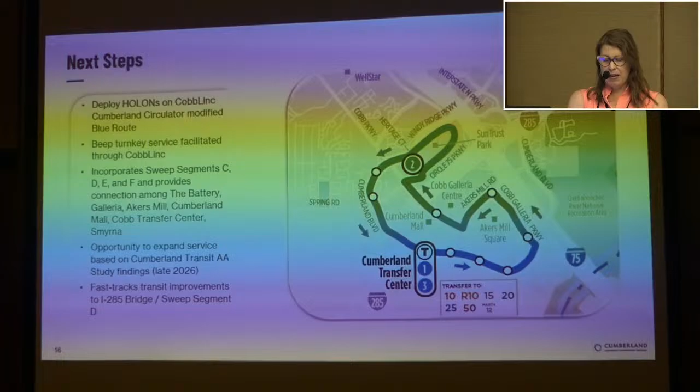So what are our next steps? We are currently looking to deploy Holons in partnership with Cobb County, Cobb DOT, and CobbLinc on the Cumberland Circulator Blue route, a modified version of that, again using Beep to offer that turnkey service facilitated through CobbLinc. The route incorporates segments C, D, E, and F, so it would allow us to bring forward 4 segments of the AV component of the sweep all at once, connecting the Battery, the Galleria, Akers Mill, Cumberland Mall, the Cobb Transfer Center.

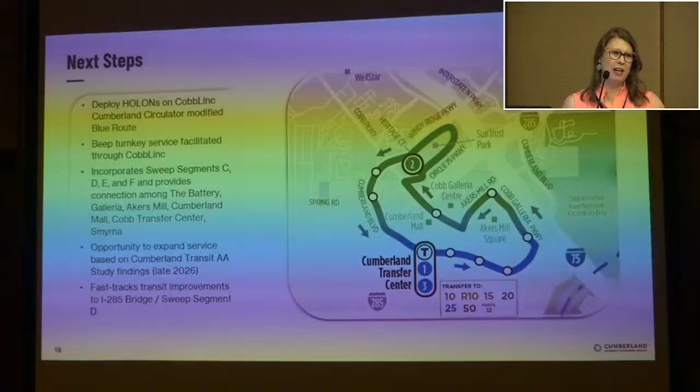Because as a CID, we aren't able to operate outside of our district, but through the partnership with CobbLinc, we can actually take this into the city of Smyrna and create the loop, which is a really huge asset for the project.

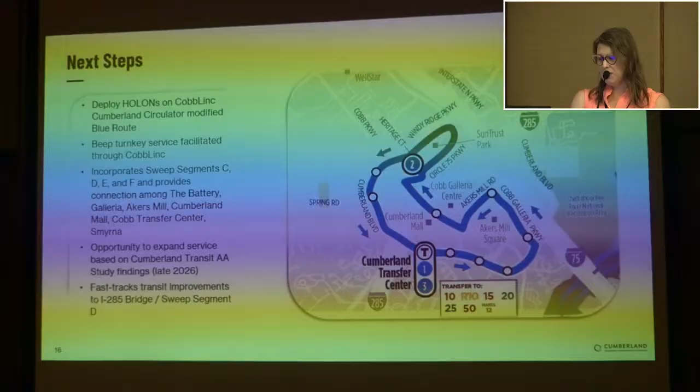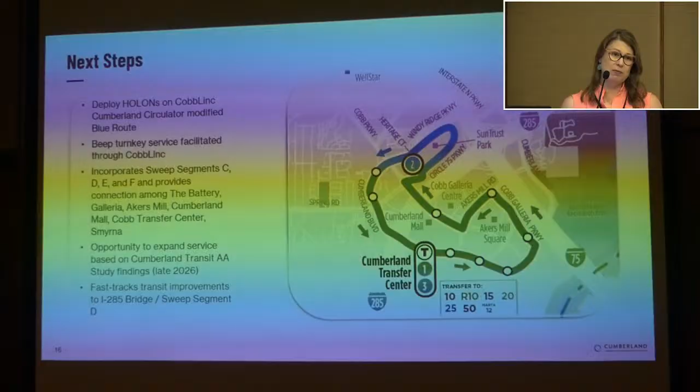This will also allow us to look at opportunities to expand service based on the study that Cobb County is currently undertaking about transportation alternatives in the Cumberland District, which will be finished later this year. And it also provides us the ability to fast track some of the needed transit improvements to the I-285 bridge and sweep segment D, so we can advance that portion of the project through the pilot that we're hoping to start in 2027.

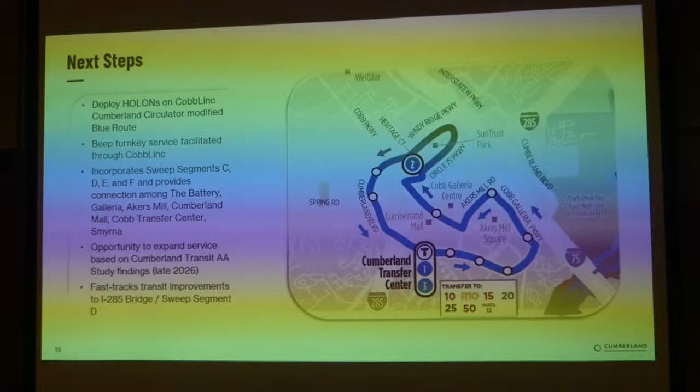As far as the Stitch, I'm curious about the environmental considerations with capping an interstate while adding these plaza and parks on top of that. What are the challenges that you're aware of, or the mitigating factors you'll have to consider once you get into design?

I know it's a little doozy of a question. Is the microphone on? There you go. All right.

Thank you. Yeah, of course, this project has a large portion of federal money, so we are subject to NEPA, and we have a team that's been very focused on environmental impacts we need to be sensitive to. It's interesting because it is an operating interstate facility, and we're essentially putting a bridge on top of it. When you define it that way, it doesn't sound nearly as complex as it really is.

There are a lot of historic properties nearby that we have to pay attention to, so we've had an extensive focus on the historic resources report and working with the SHPO to get through that process. We also have issues related to noise and visual impacts. We've worked hand in hand with GDOT, Federal Highway, and other partners to really make sure that we check all of the boxes with respect to resources.